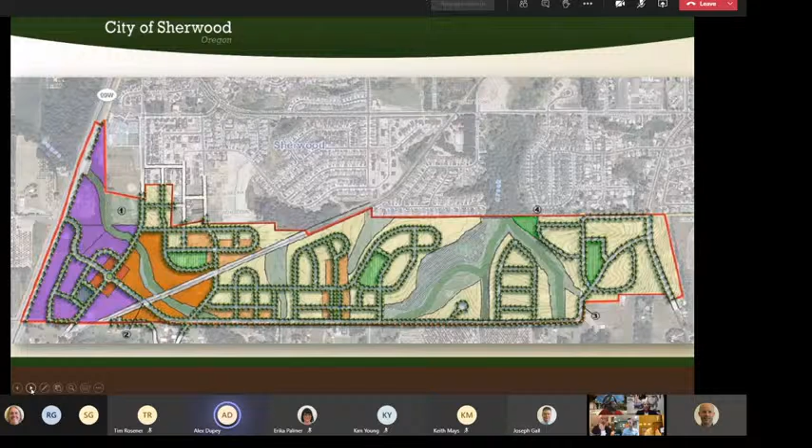Brookman Road is essentially that east-west black line on the map. The concept plan had proposed to realign Brookman Road just east of the railroad tracks to form more of a northwest-southeast alignment connecting to Highway 99W, different from the existing alignment which goes straight across. Part of that was to acknowledge, at the time, that the I-5 to 99W connector project was occurring, so this was to accommodate those pieces, but also to think about what good connections would be needed to support future development through this area.

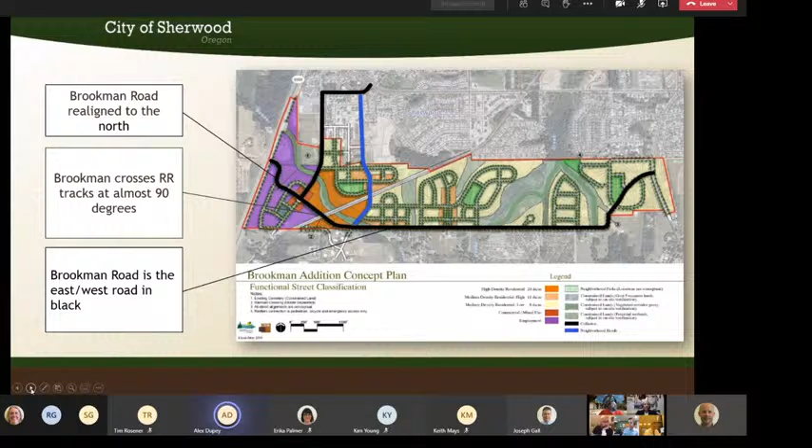On the east side, there were some changes proposed as part of this too. As you know, Brookman Road has two really tight 90-degree corners, and particularly what we've heard from stakeholders is that people go really fast through these corners. So part of the concept plan was to look at how, if you were to modify or expand this road, you'd make that a safer connection, while also avoiding as much as possible impacts to existing residences in that area, because even several years ago, there was development primarily on the north side.

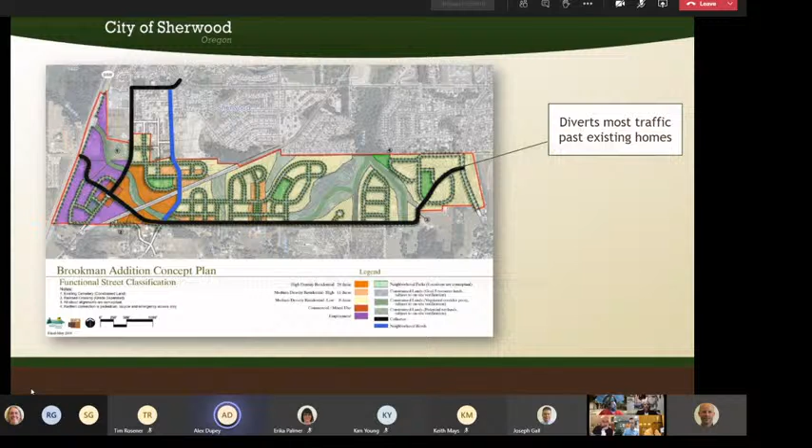Early on, we started this project before COVID—if you remember, a time when we weren't dealing with COVID, it feels like a long time ago. We met with stakeholders early on, the summer before last, to start talking about the key issues they felt would be important to address as part of this plan: what are some existing issues along the corridor, how is the corridor used now, and what are some of the pros and cons of this area and location, particularly around Brookman Road.

Overall, people had told us that Brookman Road does not feel safe, particularly if you're a pedestrian, a cyclist, or walking your dogs. A lot of people talked about using it for jogging, just for walking. It's a recreation space as well as a transportation connector, and a future design should be safe for all users. Many people acknowledge that this is an area that's developing but still feels rural in a lot of ways, so the future cross section should be able to maintain a scenic aesthetic.

That's something that was important for many people—let's not overbuild this thing if we don't need to. It should be safe for all users, including bikes and peds, as well as people pushing strollers. We also heard about people walking goats out in the area, so there's a number of different uses and things that need to be considered.

And then also, to the best way possible, connect to the rest of the city in a meaningful way. There are some significant environmental locations out in this area, some drainages that make that challenging. There's also railroad tracks and existing development. But as much as possible, make sure that this road can connect to other roads within the area to provide more opportunities for connectivity.

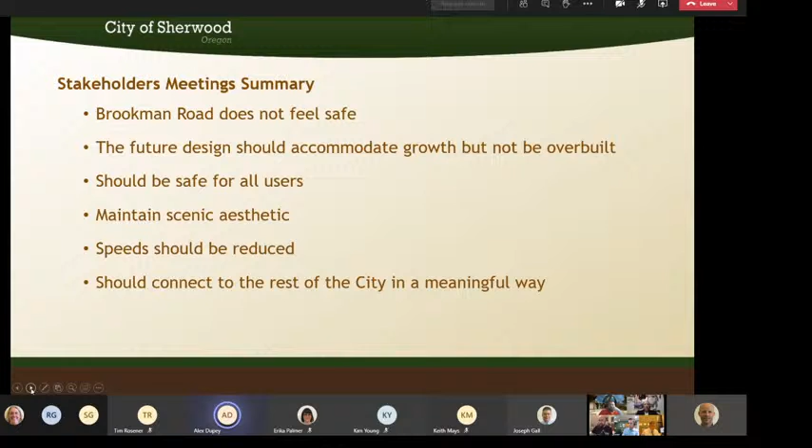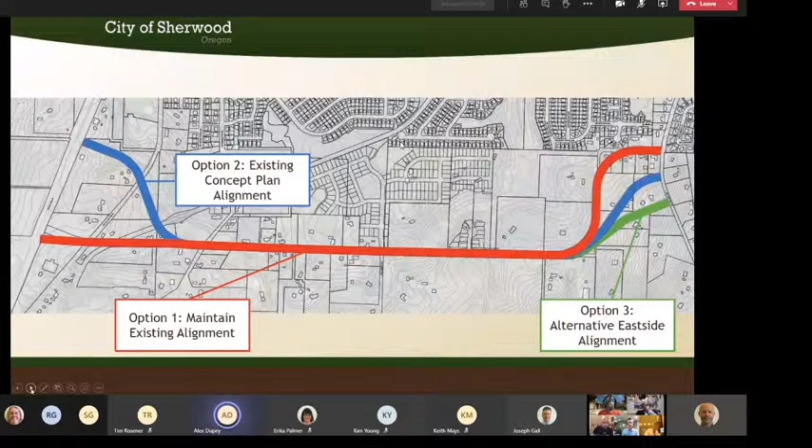So getting to the question of what this road might look like over time—that was the key question for this project. In addition to the alignment questions, the other question was: what does this look like and what are the potential effects of a 5-lane arterial that meets county standards?

The cross section on the left side of your screen is what the county has within their existing transportation plan, which is currently what subdivisions are being required to dedicate for right-of-way—about 96 feet. We also looked at a 3-lane concept, similar to what's in the existing city transportation system plan: one travel lane in either direction with a left turn lane, but a much narrower cross section since it has 2 fewer lanes.

Finally, we also looked at a 3-lane transitional road. The unique thing with the Brookman Addition concept plan is that it's adjacent to the edge of the urban growth boundary. So should there be a cross section that identifies the north side of Brookman Road as more urban, providing urban facilities, and the south side as more typical of a rural cross section? We're seeing those being developed, or at least evaluated, in other parts of Washington County too. It doesn't mean the transitional road couldn't switch over to a 3-lane or 5-lane concept in the future—it just looks at focusing the more urban facility on the urban side of the urban growth boundary.

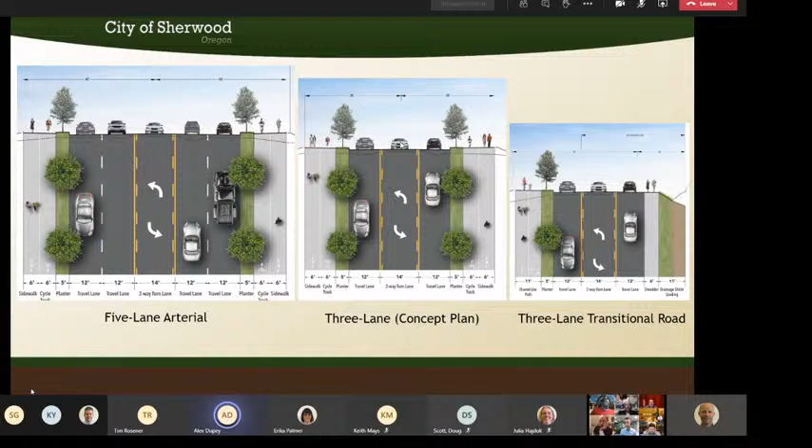So as I said, we looked at essentially - sorry, I think that's my kids making dinner upstairs.

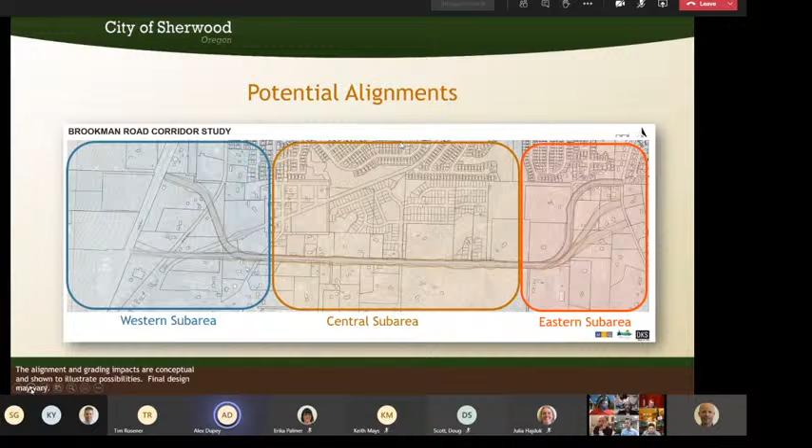We looked at essentially 3 sub-areas here. Each of these areas has specific elements we had to consider: a western, a central, and an eastern sub-area. In the western sub-area, we looked at the existing alignment as well as the concept plan alignment, and coordinated with ODOT, the city, and stakeholders. Overall, maintaining the existing alignment was pretty strongly the recommended option for a number of reasons. One is that it generally uses existing right-of-way to the greatest degree possible - it doesn't require the addition of new right-of-way. That felt like the most straightforward way to provide that connection. So the recommendation from the project team is that we maintain the existing alignment within the existing right-of-way and modify the concept plan to show that.

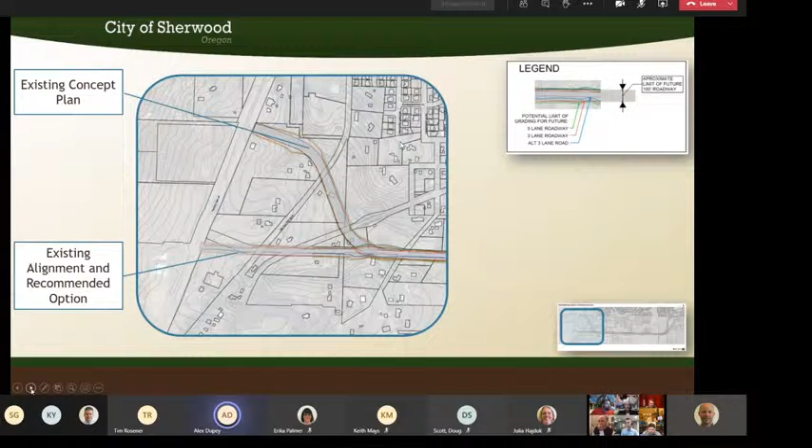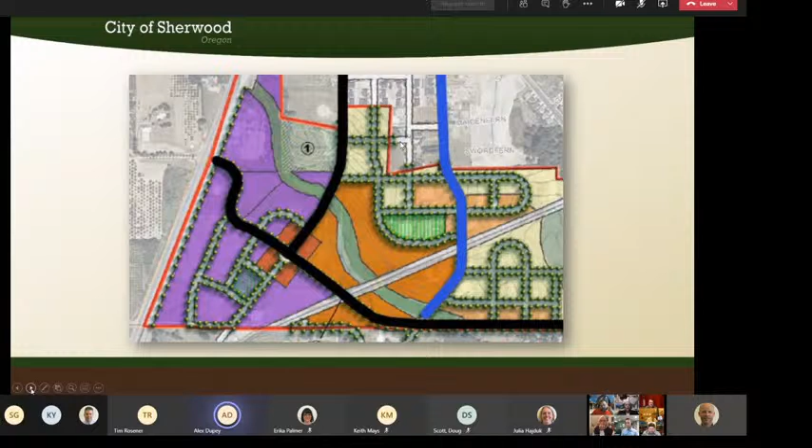Just to show - and this was a question from Planning Commission - how would that affect potentially future development? This is a blow-up of that area showing the commercial and mixed-use core. There were some questions about whether you could develop this site if you were to change that alignment, and we believe that you could pretty easily. You're still thinking about Old Highway 99 as a key spine through there, but we believe Brookman Road can still provide that connection, particularly if you clean up some access points. You can still have that mixed-use node as well as those commercial features adjacent to 99W. So we didn't recommend changing any zoning as part of this - it was really about whether you could develop this in a way that makes sense using the existing right-of-way with Brookman Road. We believe that you can, and this was just a concept we developed to show that.

For the central - one thing, can I jump in real quick here? Sure. So one thing that Planning Commission had a lot of discussion about, and there were several members of the commission that wanted to make sure council knew about this.

As part of this relook, the noticing that was done meant what the Planning Commission was allowed to recommend to council was really only the road realignment. The commission had a lot of concerns around the zoning in this concept plan, and maybe wanted to take another look at it and make some changes, but that wasn't allowed given the noticing that was done. So they wanted to make sure council was aware, so we may decide we want to look at the zoning of this section as this proceeds further.

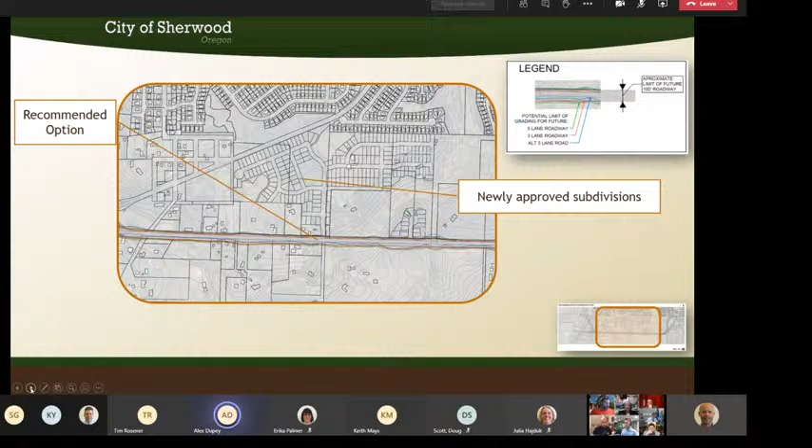All right, so let me wrap these last two pieces. In the central portion, it maintains the existing right-of-way, so we didn't recommend any changes within this area. The existing subdivisions are already being required to dedicate the 49 feet for the half street improvements, which is generally consistent with development on a single side of the road.

And then on the east side, we looked at the existing alignment option, and to provide a road of the scale that the city and county want, a 3-lane facility, if you kept the existing alignment, you would be affecting a number of residences. So that was quickly pushed off the table because we felt there were better options.

We looked at the concept plan option again, and with the widening of the roadway, we could see more impact to adjacent property. So we looked at that southern option as well, and felt that even with the widening right-of-way, it has a smaller likelihood of affecting residences directly. It's still a large footprint, but that would be a better connection to Ladd Hill, with smaller impact to existing residences in the area.

So those are the two main changes coming out of this: looking at that more southern alignment, and on the west side, keeping the existing alignment on Brookman Road as opposed to going north as the current concept plan recommends.

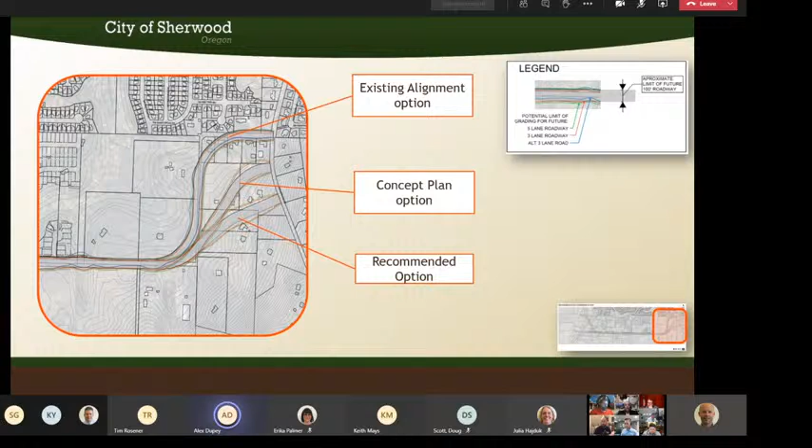So in the traffic study you did on that, what were your assumptions in terms of traffic - was it just to service the residential areas within the Brookman concept plan, or were you taking into account that it could become a cut through to get over to Oregon Street and around Sherwood?

The traffic analysis looked at regional traffic flow as well as local, and we also looked at some specific intersections to see how those might function. From an existing standpoint, the intersections generally function well, and even with a 3-lane facility, looking at projected growth on the west side of Highway 99 as well as Brookman, the recommendation was that a 3-lane facility, whether transitional or full, would be acceptable to accommodate that traffic. I know there's some potential disagreement on the traffic study, but that's the recommendation. We're looking at preserving the right-of-way long term for a 5-lane facility, but building that 3-lane transitional facility now since you're backed up to the existing urban growth boundary. This is generally what existing landowners, as they develop, are being required to dedicate anyway - a way to balance needs now while providing space to accommodate future growth.

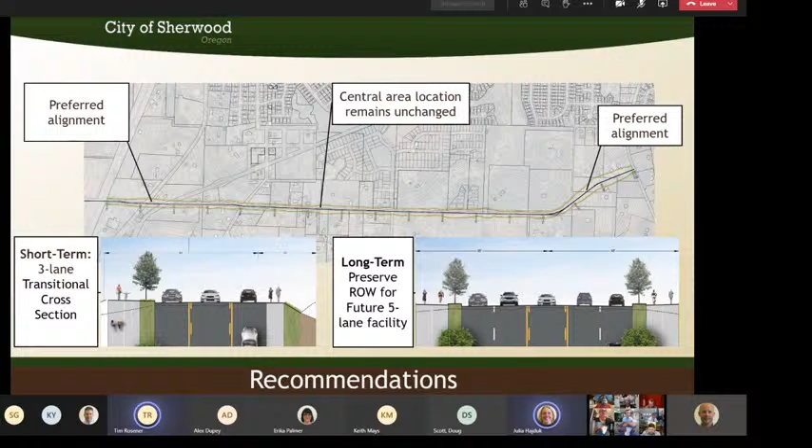I just have one quick one before we adjourn. You mentioned that the queuing space between 99 and the railroad crossing was adequate for 5 lanes. Based on the traffic study, is it adequate with 3 lanes? Yeah, we looked at both options, and even if you put crossing barriers at the railroad, you'd still be fine for queuing on the roadway with either a 3 or a 5 lane facility.

Part of the reason I think about a separated grade crossing there is it's not just about traffic, it's about connecting East and West Sherwood and not having this barrier of 99 West with the long waits at the traffic lights, to keep our community connected, which is already a challenge. So if we could go with the overpass there from day one, that would be ideal. Probably not in the cards, but we should allow for that.

Erika and Julia, last question for this. So we're having development going out there, we're adjusting the alignment. The development that happens down there, they're not building any of this improved road, is that correct?

Right now, the developments going on out there are dedicating the right-of-way for the portion they have to dedicate, and some of them are paying a fee in lieu for improvements down the road. No pun intended.